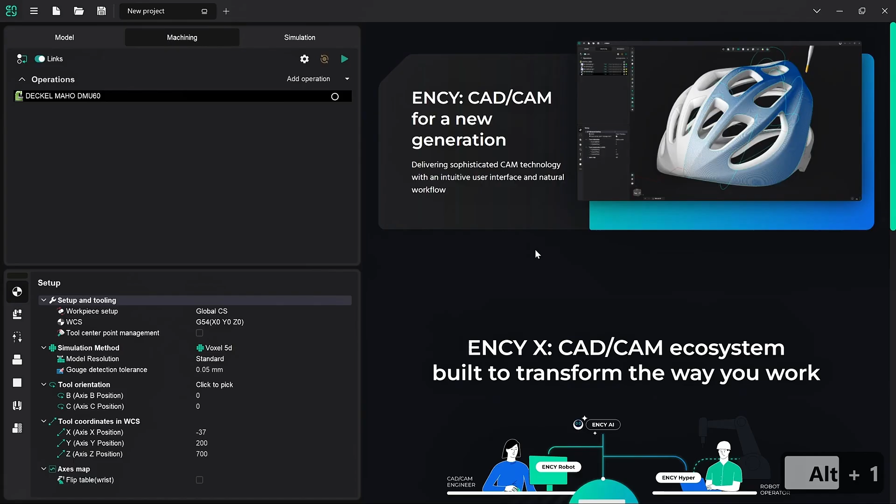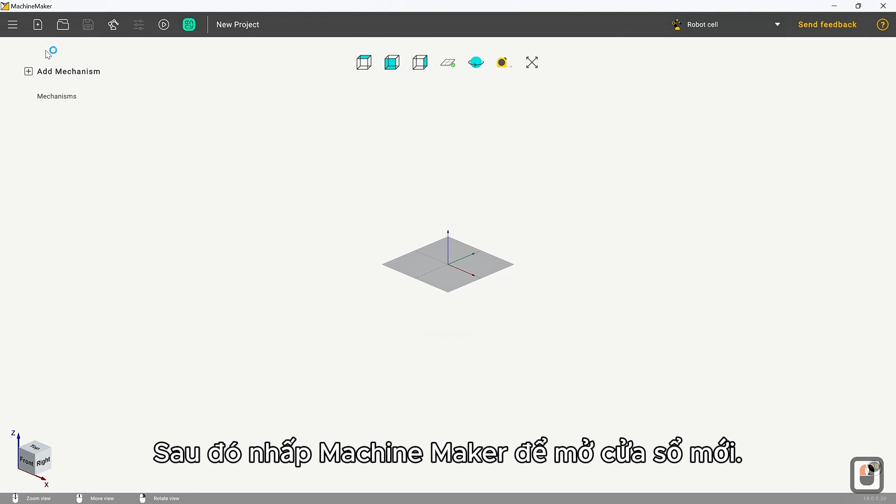In this video, we'll be covering the principles of setting up a basic robot machining cell using MachineMaker, which is available with every installation of ENCY, and it can be found by clicking on the 3-bar utility icon up in the top left of the screen here, and then clicking on MachineMaker, which will open it in a subsequent window. So, as you can see, we're starting from a completely blank canvas here.

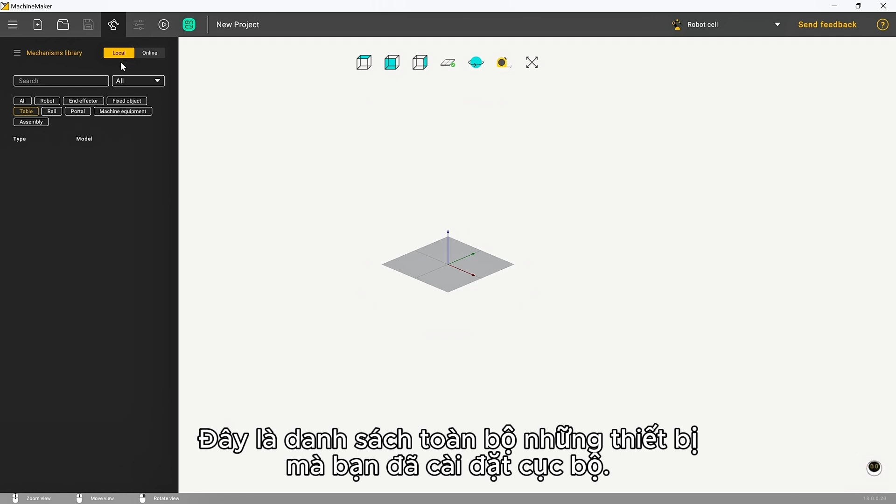And to add the first element, which is going to be a robotic arm, I'm going to click on the mechanisms library here, which is a complete listing of everything that you have installed locally, but also gives you access to a very, very well stocked online repository of parts that have already been set up and exhaustively tested and proven to work by the team at ENCY, which makes our lives an awful lot easier.

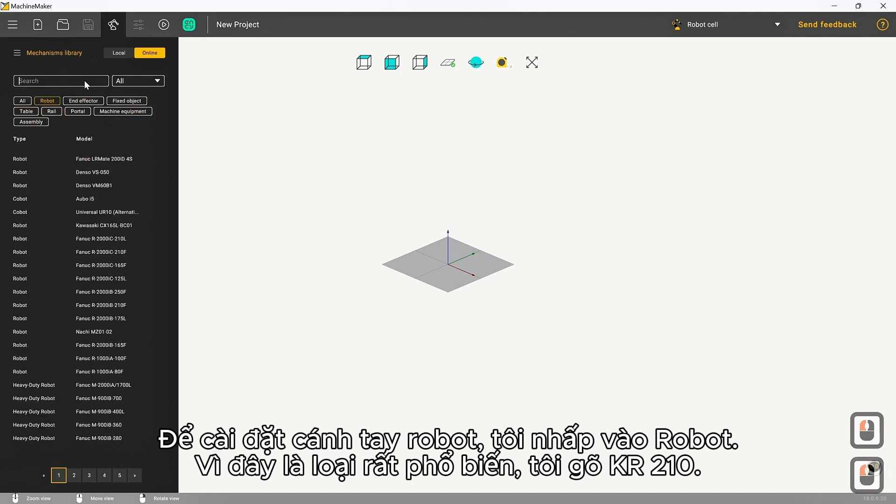So to install a robot arm, I'm going to click on Robot, and since it's a very, very common and popular unit, I'm going to type in KR210 because it's a KUKA robot that appears almost everywhere. I'll click on Add now, and you can see we now have our instantly installed KUKA KR210 robot. However, as nice as this is, it's not much use to us without an end effector.

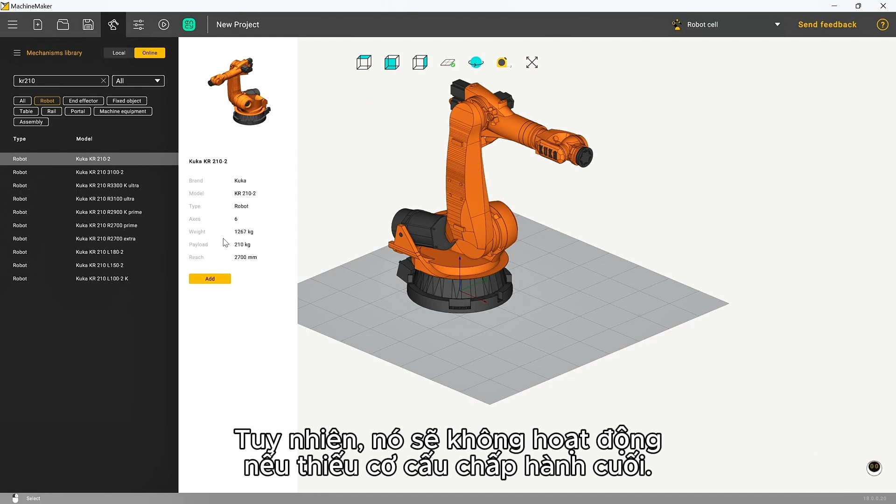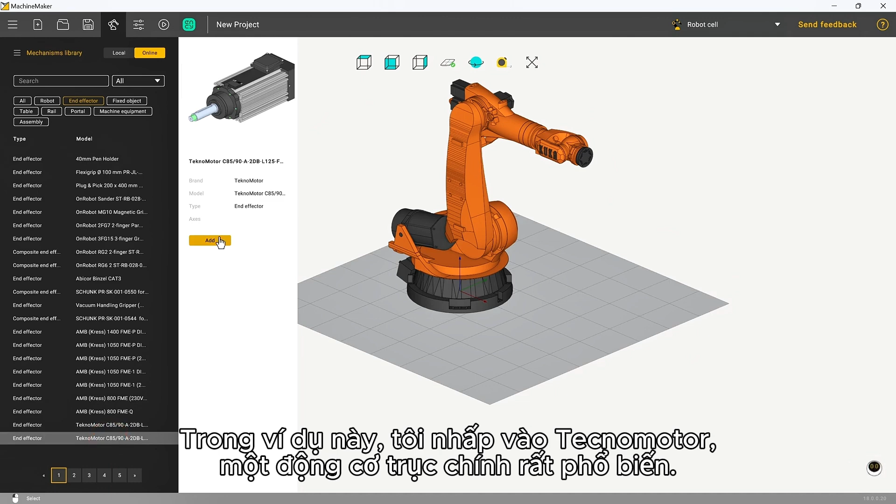So we're now going to add an end effector by clearing the search results, going to the end effector subset, and for the sake of this particular illustration, I'm going to click on the bottom TeknoMotor end effector, which is again a fairly common spindle motor, and I'll click on Add. So you can see that automatically it's applied it to the end of the end effector flange on the robot. This is obviously very helpful, with appropriate linkage and everything.

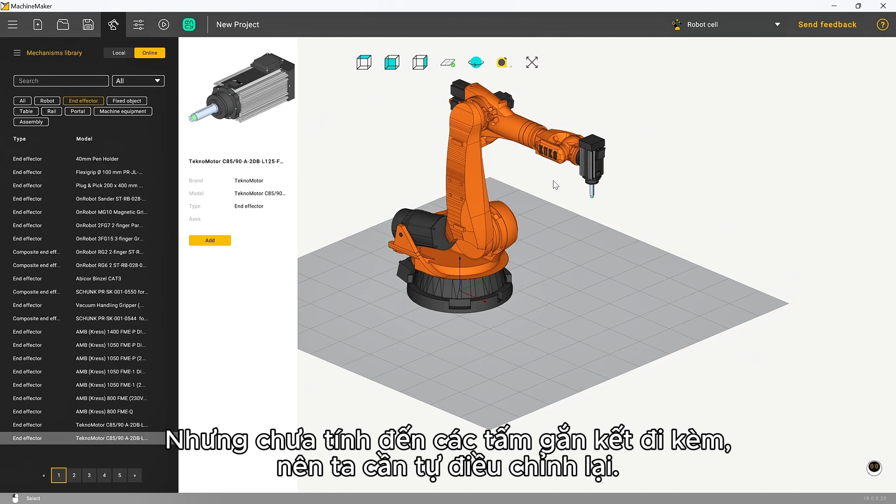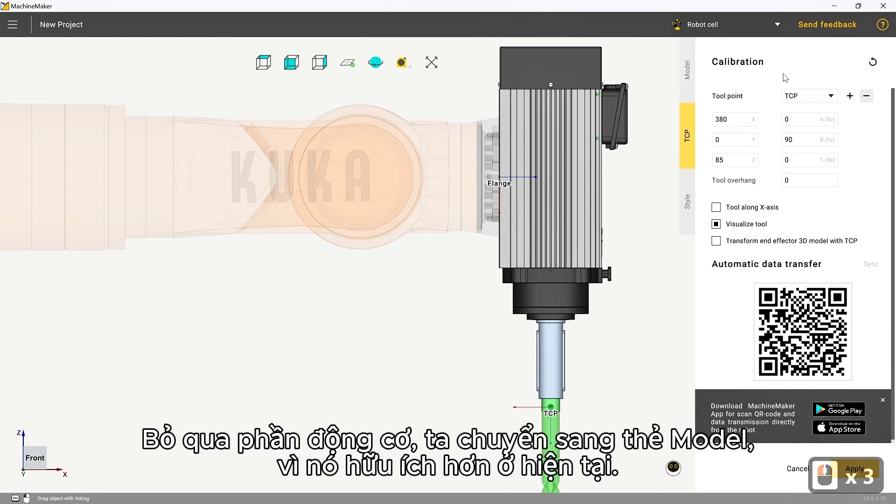However, it doesn't account for things like any kind of mounting plates that are going to be present, so we need to adjust that ourselves. So to do so, we click back in the main space. I'm going to click front on the navigation cube, so we've got a nice perpendicular view of the surfaces we need. And then I'm going to double click on the spindle motor itself. I'm going to ignore what's in here for the moment, and we're going to go to the model tab because that's more immediately useful. I'm going to zoom in by scrolling our mouse wheel down a little bit.

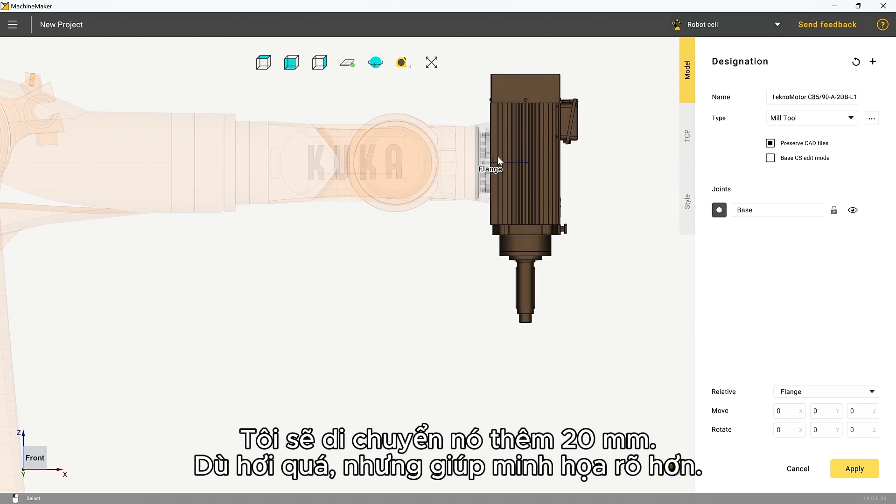Now, I want to move this away from the flange plate a little bit because obviously there's going to be some kind of interface plate that's used to bolt everything together. And I am going to move it by 20 millimeters, which, sure, it's a bit overkill in real world situations, but it's a nice clear illustration of what we're doing here. Now, the thing to note is because that motion is predicated on the flange plate's position and orientation in space, we need to move the spindle motor in Z, not in X, as one would initially suspect.

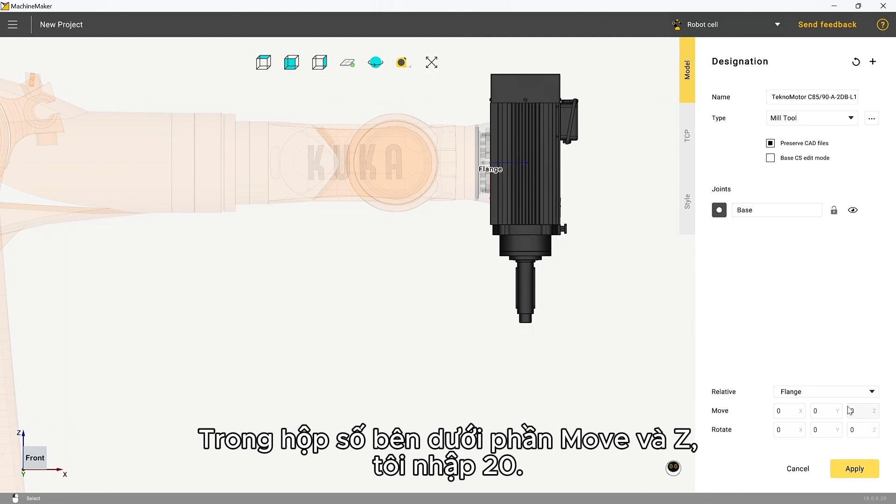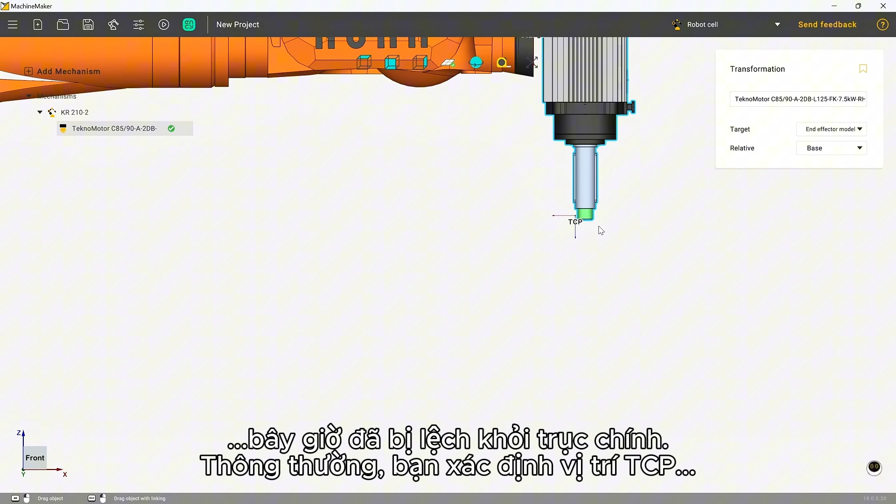So in the number boxes down here under Move and under Z, I'm going to type in 20. And you can see how that's now moved in the direction that we're expecting it to. And I'm going to click on Apply. There is, however, still a slight problem that needs addressing with this. And if we zoom back in, you can see that the TCP point is now offset from the rest of the spindle. Now, ordinarily, you would determine the TCP location and position by running a twin spike calibration method or

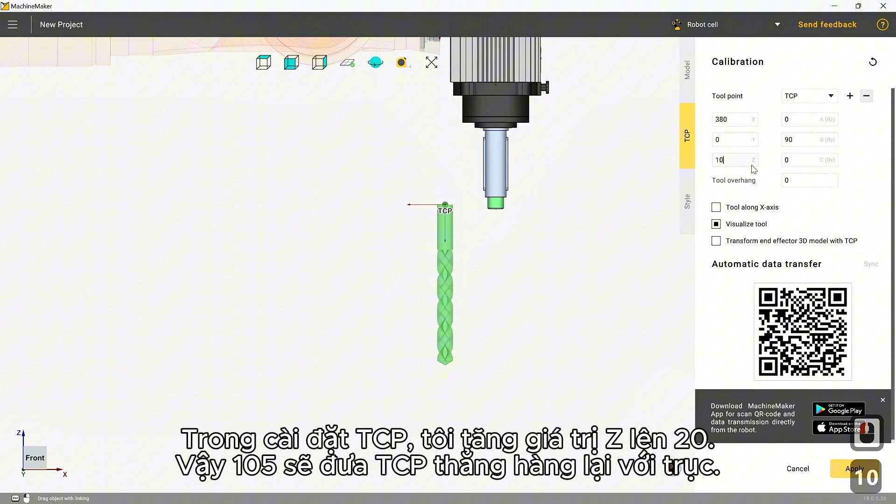whatever. But for the sake of simple alignment, because we're only doing a demo cell here, I'm going to double click on the spindle again, and in the TCP setting I'm just going to bump up the Z value by 20. So 105 brings the TCP back in line with where the spindle nose actually is.

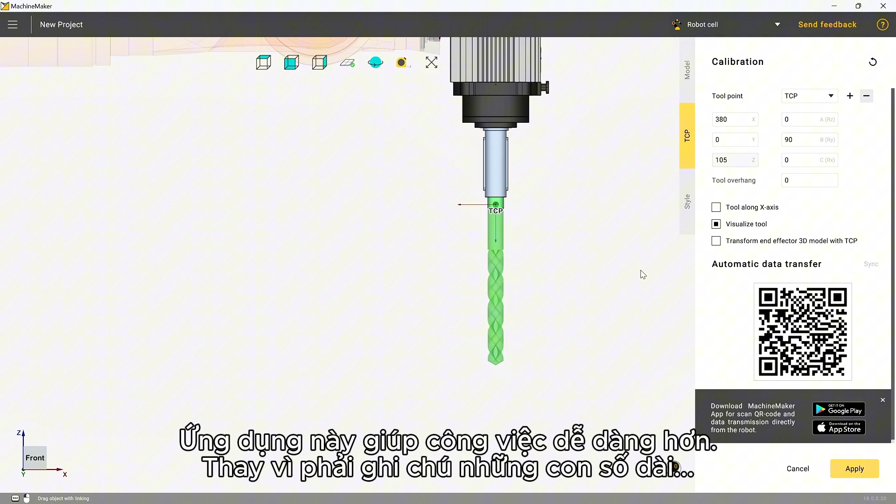However, for the sake of accurate settings of TCPs, the team at ENCY have actually put together a mobile phone app which will make your life a lot easier when doing this. So instead of having to scribble down some very, very long and detailed numbers with tiny, tiny decimal values hanging off the end of them, you can actually just take a photograph of the TCP results in the MachineMaker app on your phone, and it will transcribe those results for you. It will also list the tool length, so it'll make the necessary transformation for those results.

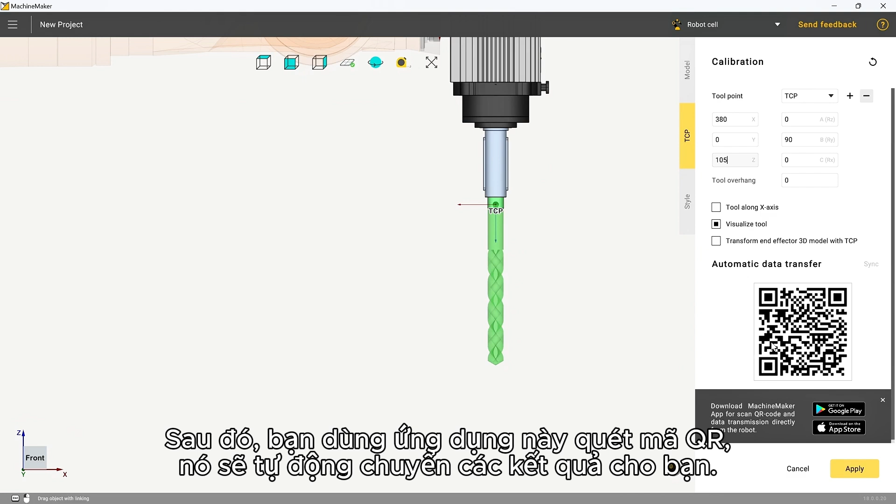And you can then use that same app to photograph this QR code, and it will automatically transfer those results for you without any possibility of there being a mistyped number or an accidental slip of a decimal place or whatever, which, let's be honest, we've all done before.

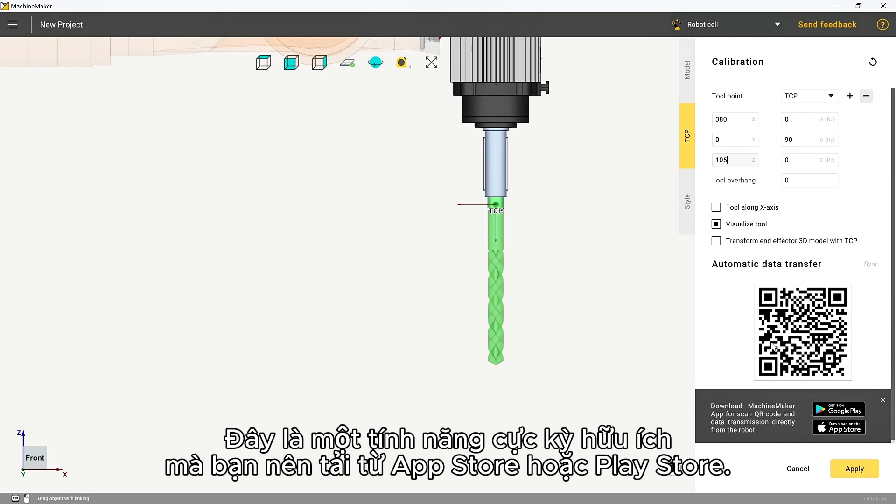Which will save you a lot of potential pain when setting up your robot for yourself. It's a really, really useful feature, and one that's absolutely worth downloading from either the Apple App Store or the Android Play Store, depending upon your platform of choice. Anyway, we've now set this, so we click on Apply to close that out again.

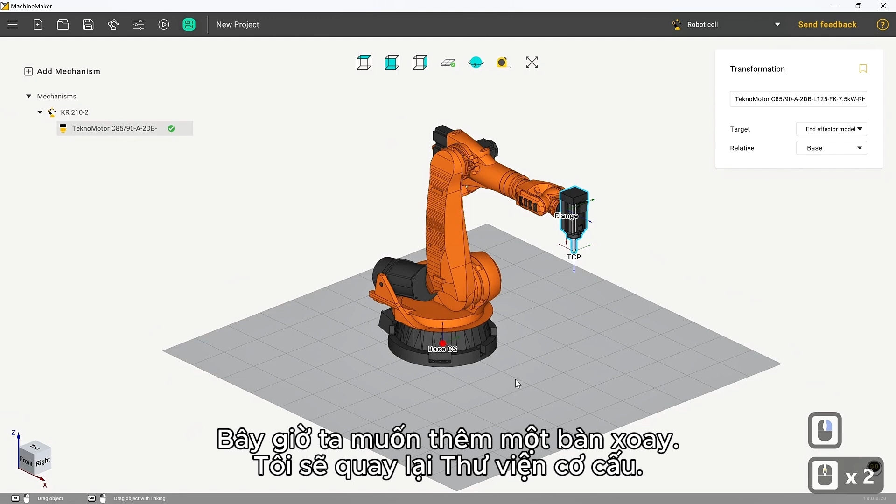So great, we've got our robot, we've got our spindle. Let's say we want to add a turntable now as well. So to do this, I'm going to go back to the Mechanisms library, and I am going to click on Table. And we now have a very nice, very comprehensive listing of single and dual axis turntables of various configurations and orientations, as well as some static tables as well.

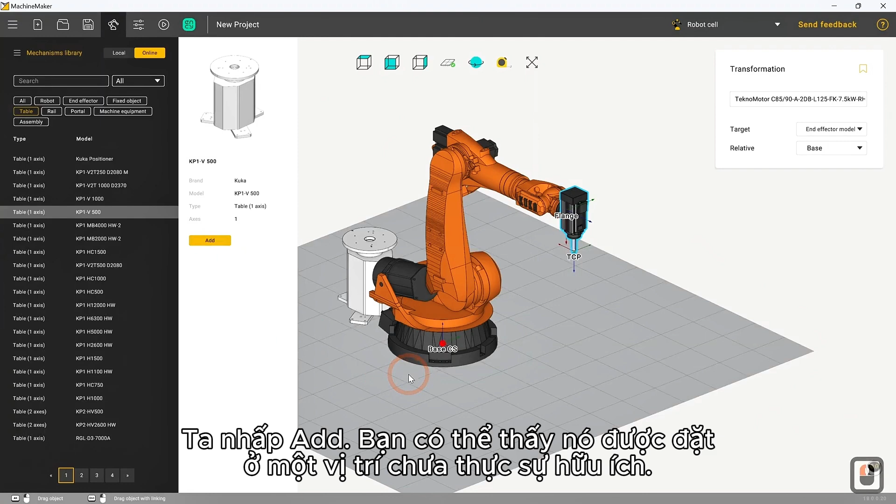For this, I am just going to click on a very, very simple known entity, the KP1-V 500 turntable. Again, KUKA product, matches the arm nicely, and they're pretty ubiquitous. So I click on Add. Now we can see that it's been set up in a place that's not very useful to us. So instead of leaving it as is, we've got a couple of options to be able to move it around.

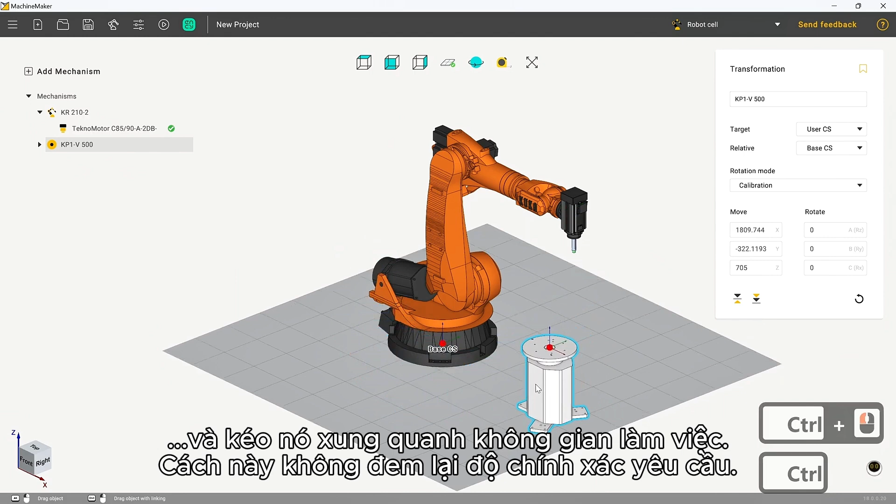The first being we can just click on it to highlight it, hold Control, and then drag it around the environment. This doesn't really give us the level of precision that we're going to need though, because as we're all well aware, precision is very much the name of the game when it comes to setting up robots. So instead, with this still highlighted, we're going to go into the numerical data points here. I'm going to type in, say, 1950 in X and minus 320 in Y.

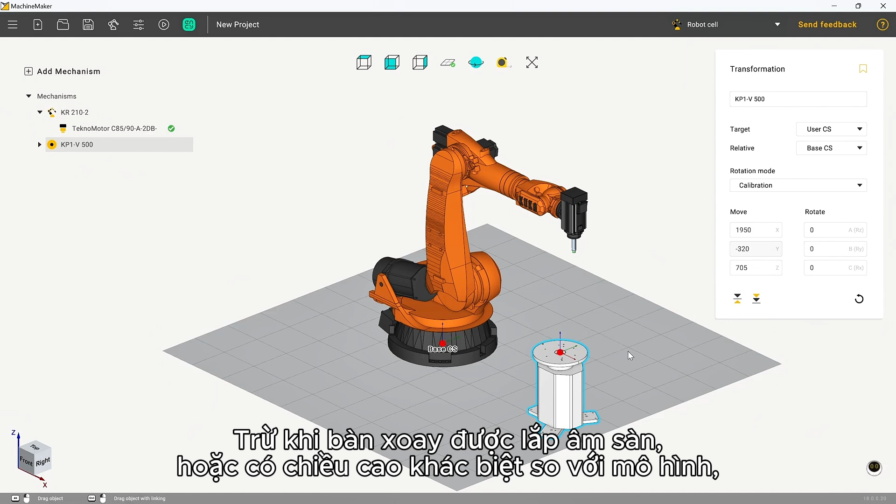I'm going to leave the Z value alone because unless your turntable is recessed into the ground or is of a drastically different height than the pre-configured models here, like it's on a plinth, for example, it is a very, very dangerous move to change the Z value, because that Z is predicated on the top surface plane of the turntable itself, and that defines the user coordinate system for being able to machine objects on said turntable.

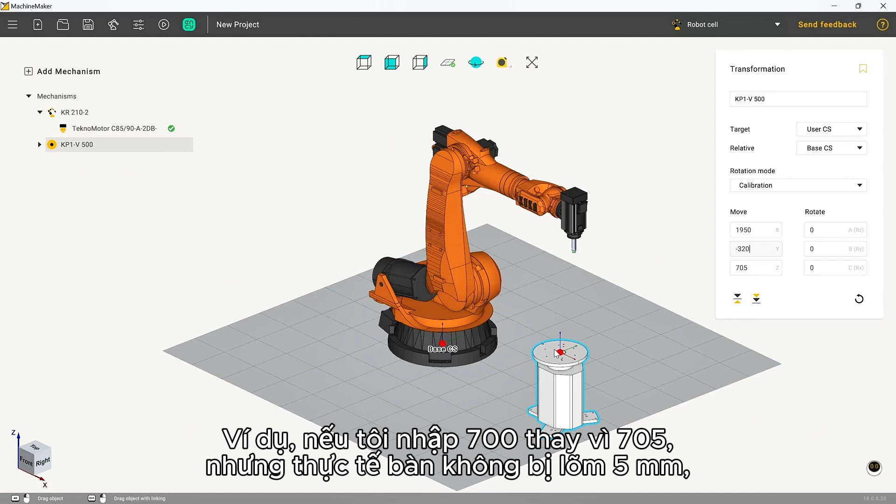So if, for example, I were to type in 700 instead of 705, and it turns out that the real world turntable is not recessed 5mm into the floor, you're going to potentially be taking 5mm of steel off the turntable plate, which at the kind of speeds that robots tend to machine at, that's not going to go well for anyone.

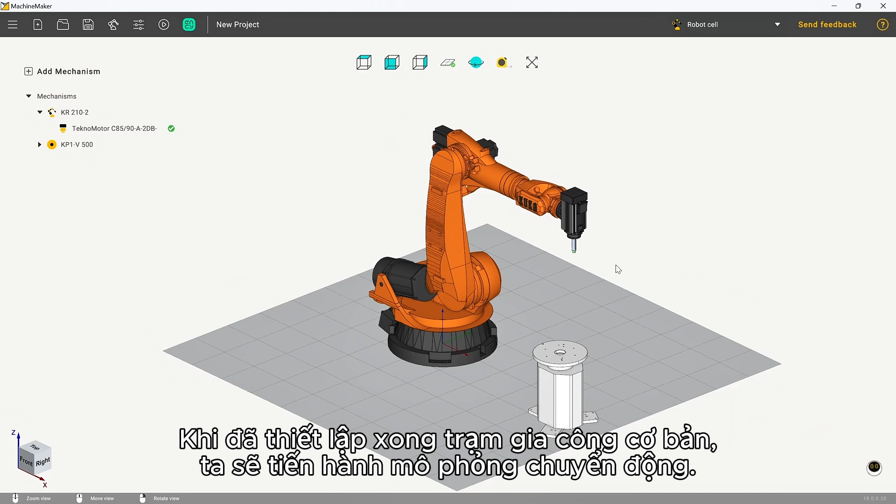Anyway, now that we have our basic machining cell set up, we can go through the process of simulating the range of motions, so we've got a clear idea as to where any kind of restrictions need to be imposed. And we have a very handy tool for that within MachineMaker itself. So if you click on the Run Simulation icon here, you will have the option to not only enable collision detection, which I'm going to click in a second, but you can also demonstrate the ranges of motion available to us using these particular kinematic structures.

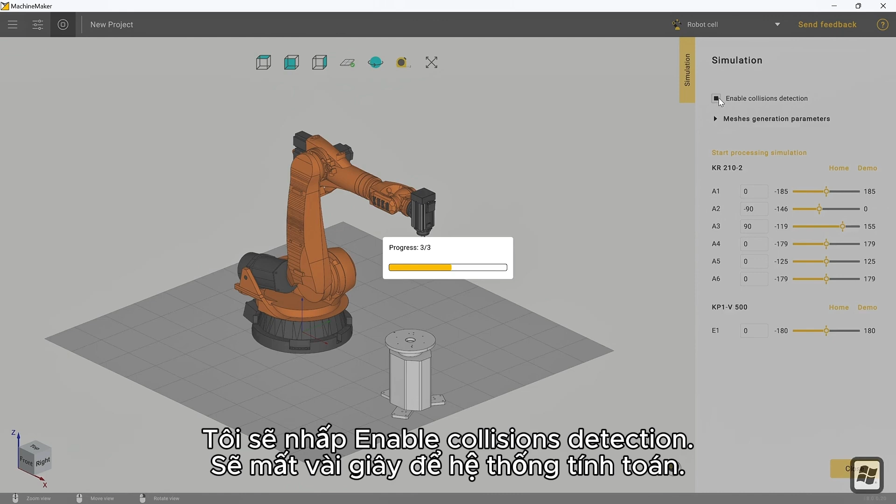So I'm going to click on Enable Collisions Detection now. It will take a few seconds for it to calculate what it's doing. Okay, so now that that's fully calculated, we'll start out with trialing the turntable range of motion first. So we'll click on Demo here, and we can see the turntable rotating through both 180-degree ranges of motion for it.

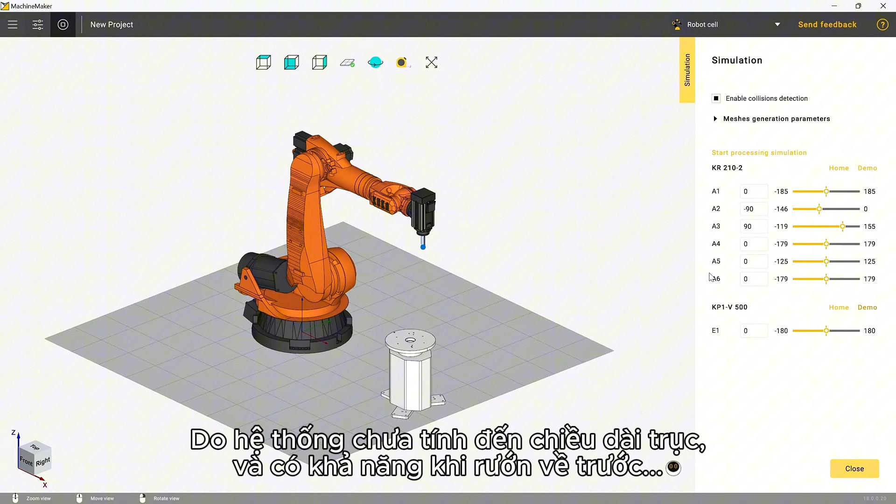Now, if we click on Demo for the robot arm, we will see a few collisions coming up, because obviously it hasn't accounted for the length of the spindle yet, and there's a fair chance that when it leans forward, it may hit the turntable. But since this is just a very, very fast demonstration of the entire range of motion, we can then subsequently go back and take a look at what ranges we have to limit it to and what we can't allow it to go near. It's a very, very